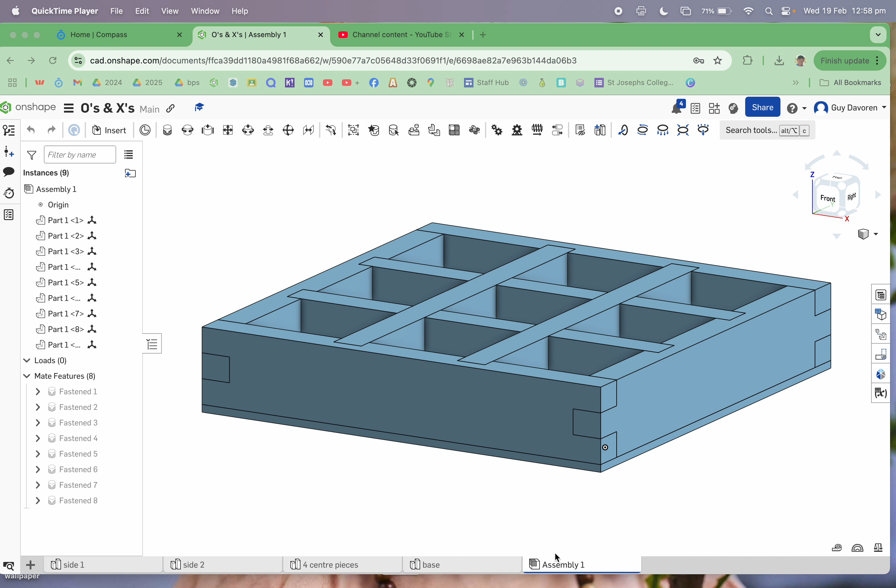G'day Year 9. So now I will do the orthographic drawing from the assembly that we've got. So far I've got side 1, side 2, all drawn in separate design part studios, the base, and then we've put it together. So there's our assembly. So what we're going to do is set up an orthographic drawing with that.

So we come over here once again to the plus, the insert, the new tab over here on the bottom left, and this time create a drawing.

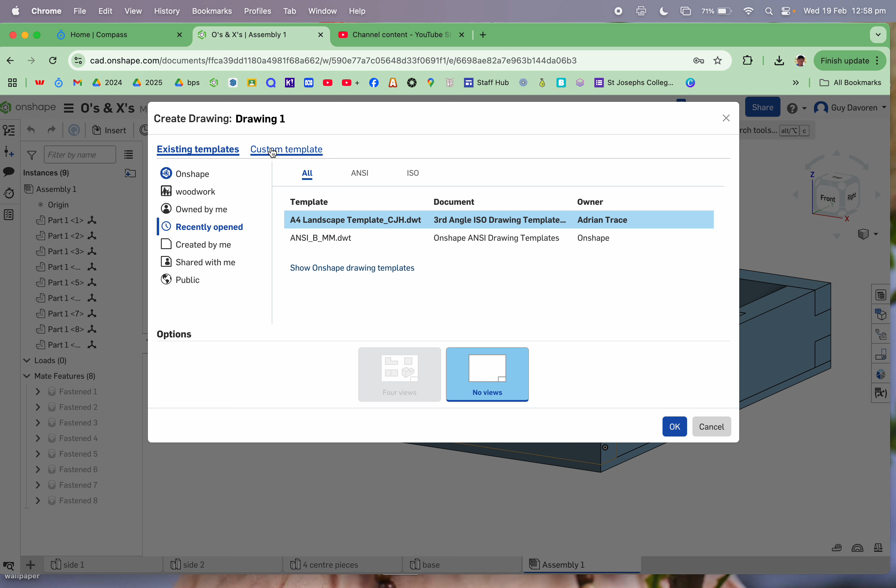Now, there are existing templates and there's a custom template, so I'll go through what I want you to do on this one. If we do the existing one, when you draw it, it comes up with its own title block. So I'm going to go custom, ISO, size, we'll change that to A3.

Now it's in millimeters, so that's fine. This one doesn't matter. Down here, I want you to change that to third angle. I'll explain what all that is later on, but we go to third angle. Border, we can include the border. These things don't matter. Start zones, that's okay. And the title block, we don't want the title block, so do not include that. So it's ISO, A3, millimeters, third angle, do not include title block. Then we go, okay.

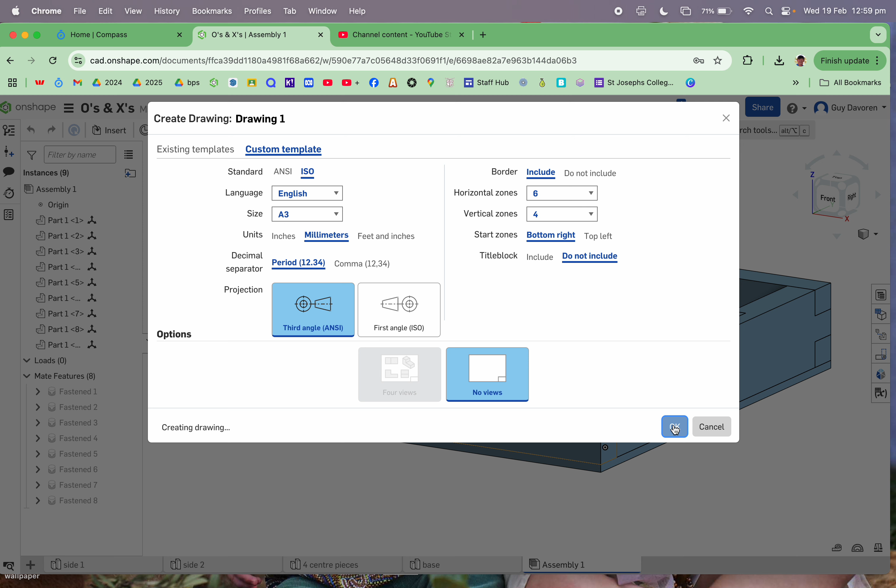Okay, we get the drawing sheet like that. Now it's similar to the other ones where you can insert things. So we can insert things from the part studios, the individual pieces if we wanted to do a drawing of just individual parts, but I wanted a drawing of the whole assembly. So I go over here to assemblies. That's what I want in there.

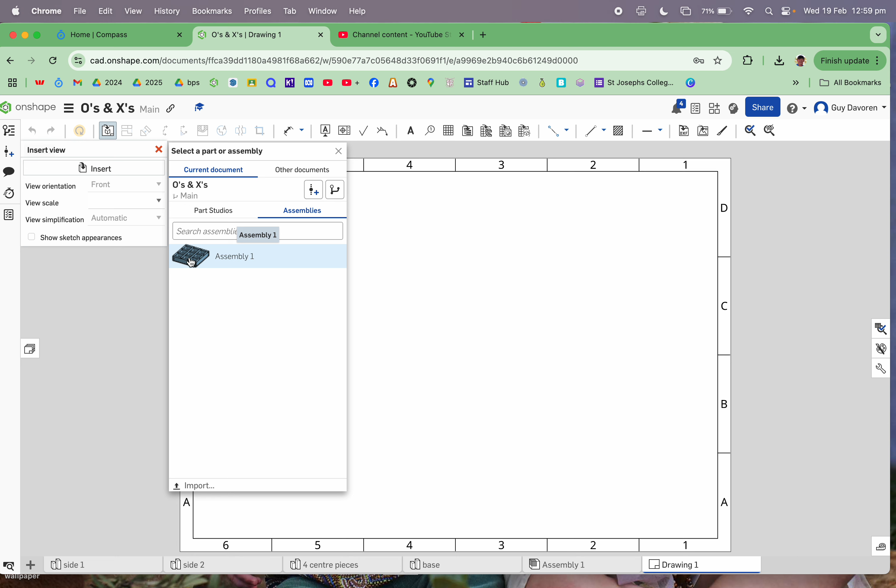See, when you're setting this up, you can change that scale to different sizes, but 1:2 works pretty good for this one, so we'll just leave it at that. See, if I did 1:1, we're not going to fit everything on, so 1:2. So you just check that before you start.

Okay, but I'm going to put the first view about there. Just click it and just got to wait for a second. Now if I drag my cursor, see how it draws the top view above it? Now I want an equal sort of space between, underneath, in between, and to the top of the page.

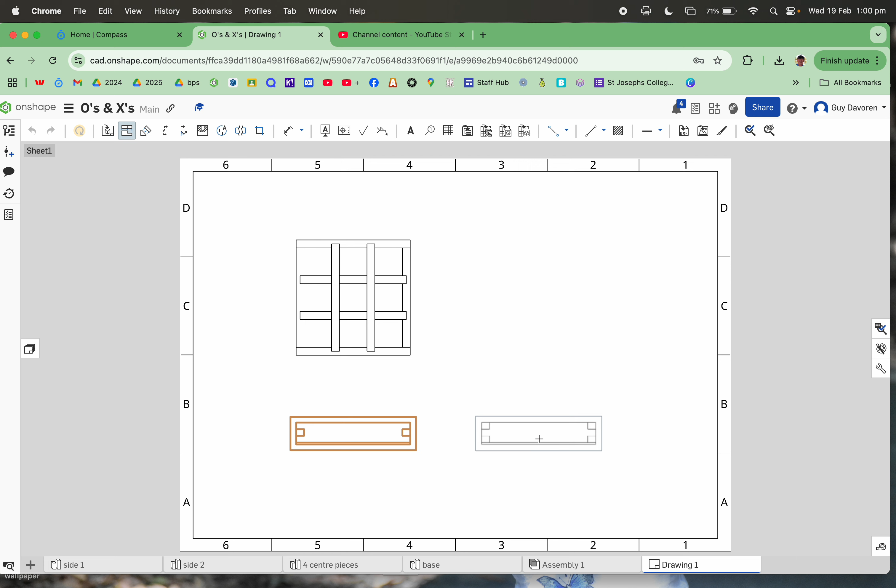So that'll do there. Now come back down to the front view, click, and it goes that darker brown again. This time I'm just going to come straight across. Don't rush this step because you can make a bit of a mess of it. And I'll click again now. And finally I'll come back to my front view again, click it, we'll get that brown, and then bring it up to the corner. You sort of don't click too early, but position it so that it's in a reasonable spot. So that looks okay there. And I'll click that. So there's the basic setup of my drawing.

Now the other things that I need to do will be to put - I might do the dimensions first. So this is the dimension tool. If I click that, if I put the dimension across there to there for starters, bring it up, and you slide it across and it'll snap on the middle, but that looks okay there.

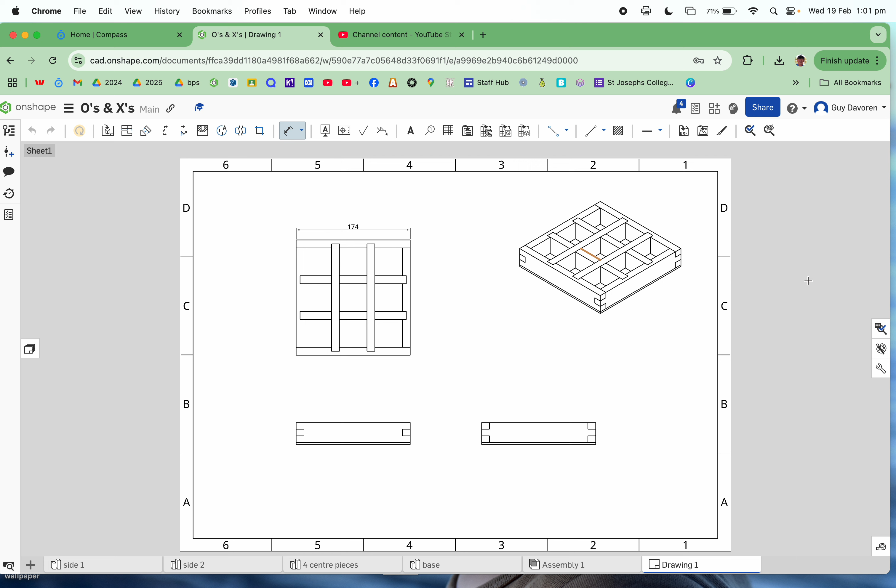Now the only problem with putting all these dimensions on is that because they're the same color as the drawing, often by the time you're finished, it's hard to tell where the drawing starts and finishes. So if we come over here to the little spanner, drawing properties, click on that, come up here to dimensions, click on that, and then to color, and just pick another color. That'll do for green, and you can see now it's changed to the green color, so it just doesn't stand out as much. Okay, so I'll get a few more dimensions on quickly.

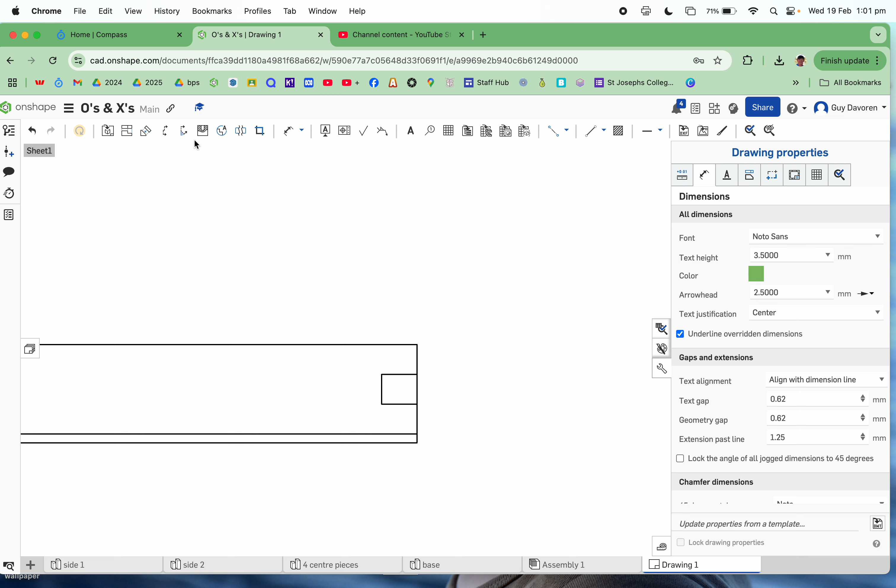Dimension. Now you can see how you can move it, and if that's going to be fairly cluttered there, I'm going to put the number on the outside. And I'll do that one as well. That will do there. Now I know I'm going to put the 30 here because that tells you exactly how big it is without having to

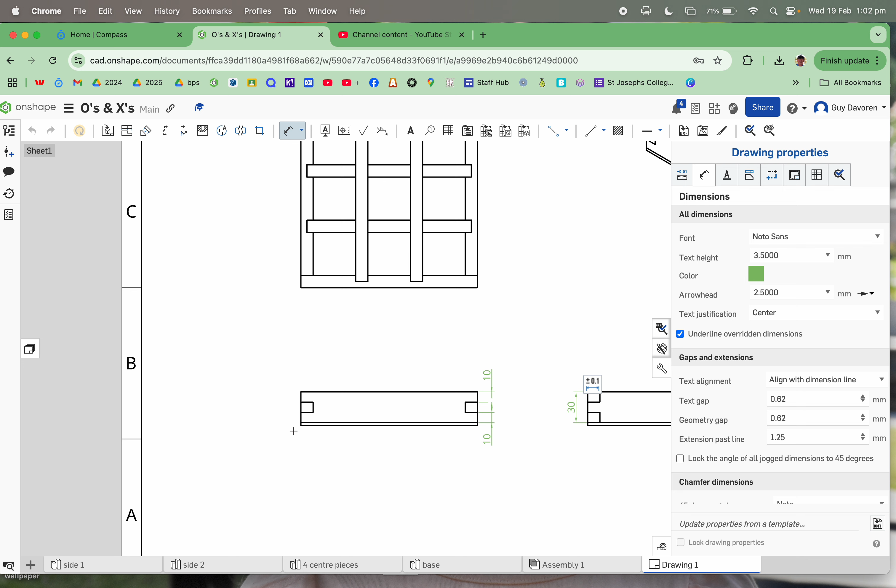Have 3 dimensions all cluttered there. Now on this side, I might just come in here and do that one there. That just shows how thick the base is, and I'll put the 3 out of the way like that, move a little bit further away.

All right, so we've got all those covered. We've got the overall one there, so I'll need the overall one here. 174. And we'll also want these. Now so I'm touching that corner, bring it out, and it'll snap on the same size for me.

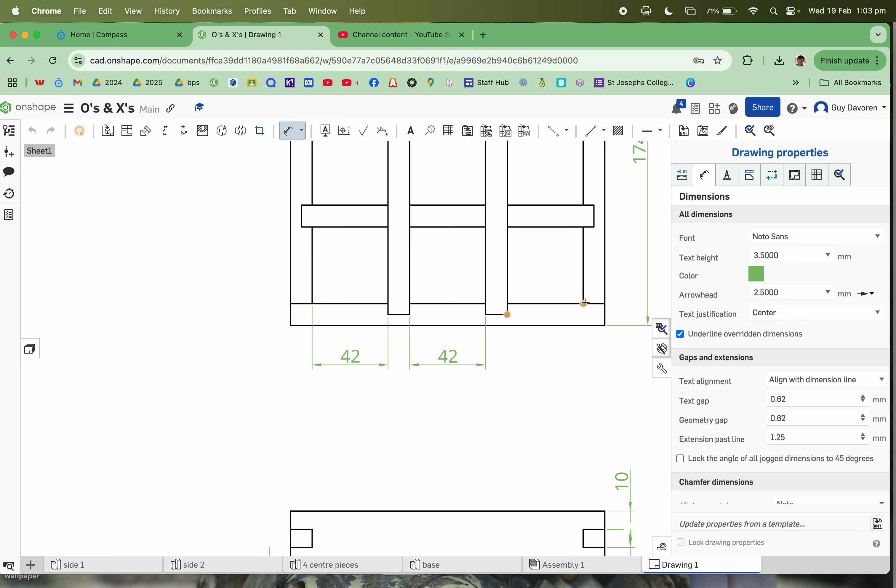And with this one, I'm going to go from there, and see it has to go across a bit of an angle, but still when it comes down, it will come down straight. That's all fine there, close that up again now. That's possibly enough as far as dimensions go. Yep, that'll do for that.

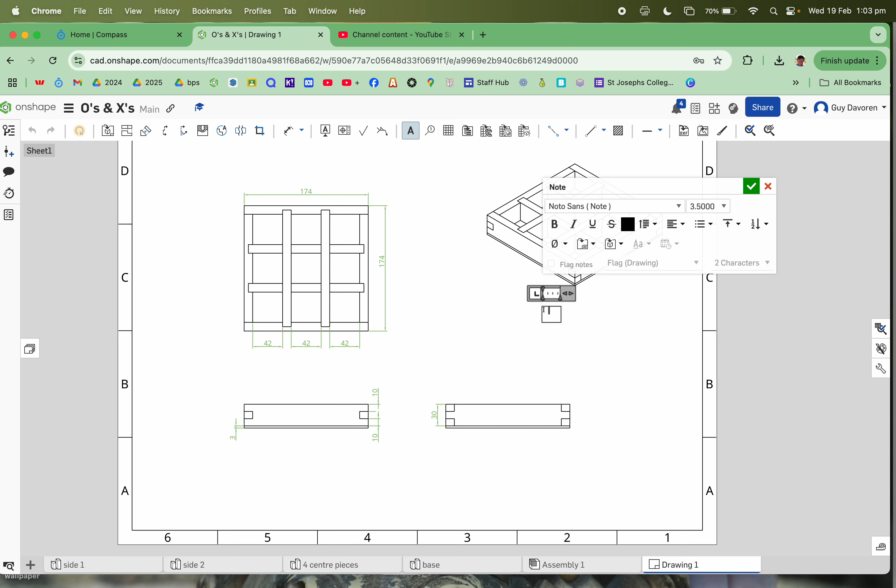So now we go to text. We'll just label each of the views. So I'll call that one the isometric view because that's what it is. And tick it. Now there's something funny about this, how now if I go in and close that off, now when I select it, I'm able to drag it out so it's just in one line. I haven't worked out why that happens.

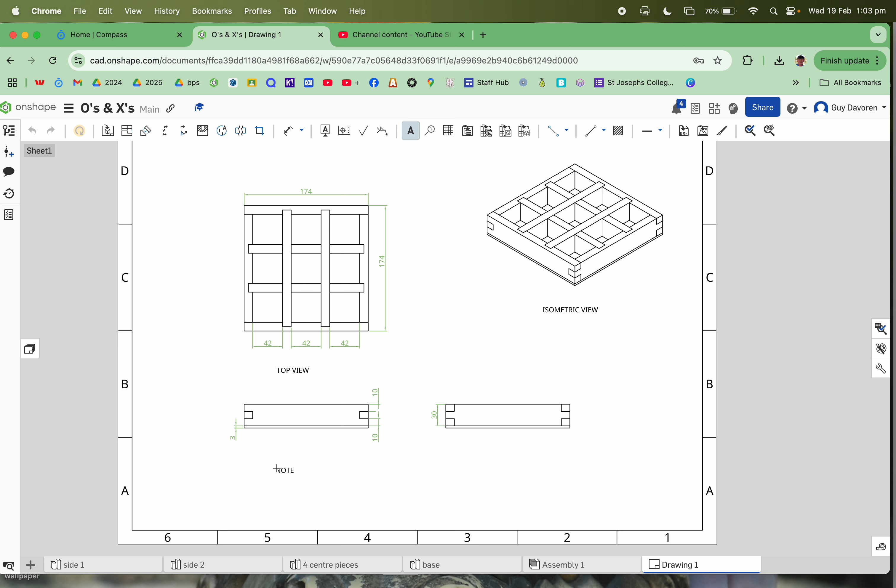But now this one's called the top view because you're looking down on top of it. Tick. Let's come out right, that one. So this one's going to be the front view. Tick. So this is what I'll have to go in, cross it, come back and select it again and let me drag it out. And the last one will be down here, so that's going to be the right side view. Because you're looking at it from the right side, right hand side. Tick.

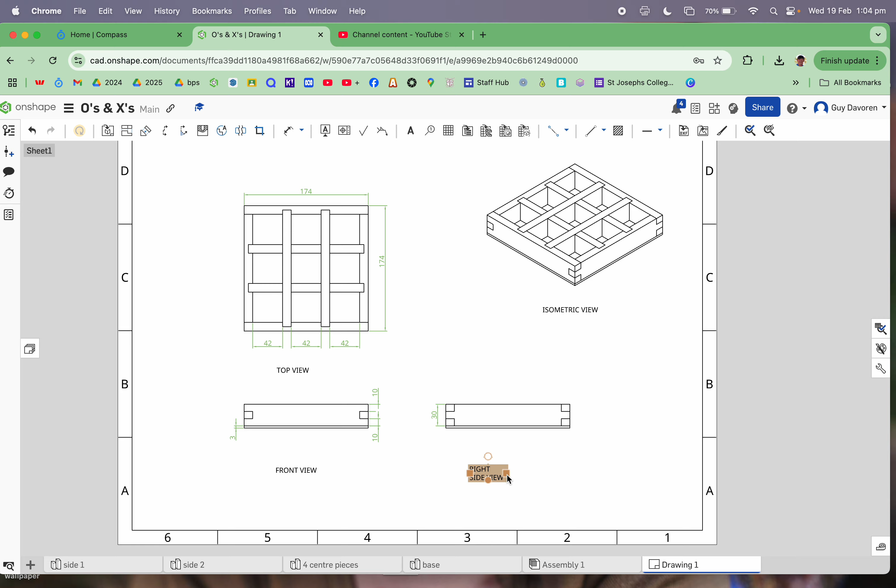Now, title block. Down here, I'm going to get the line tool. There, that should be big enough. I'm just going to draw a box. Don't worry about measuring it. That should be enough there. Click and click. And I've done the outside first because then when I come in to get my line tool again, it'll snap on the midpoint for me. I don't have to measure anything, but that looks okay.

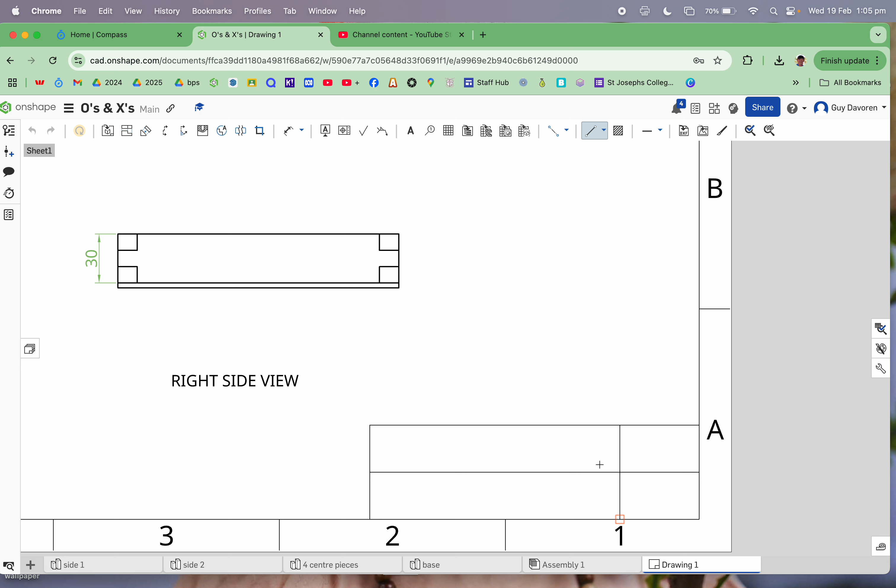Escape that, get the line tool again, and take it down. Then I've got 4 little spaces to put stuff in. All right, so I'm going to go there. The drawing is the noughts and crosses box, so

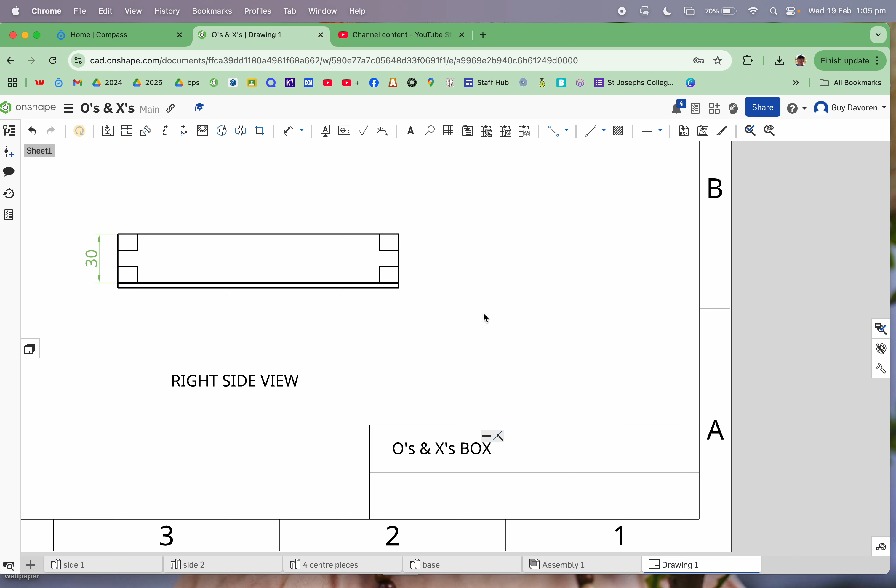And if anybody works out how to fix that text so I don't have to keep doing that, let me know. I'm sure there's a merit in there for you. Okay, so there's that. I'll put my name in the next one. If I can find the text, there is.

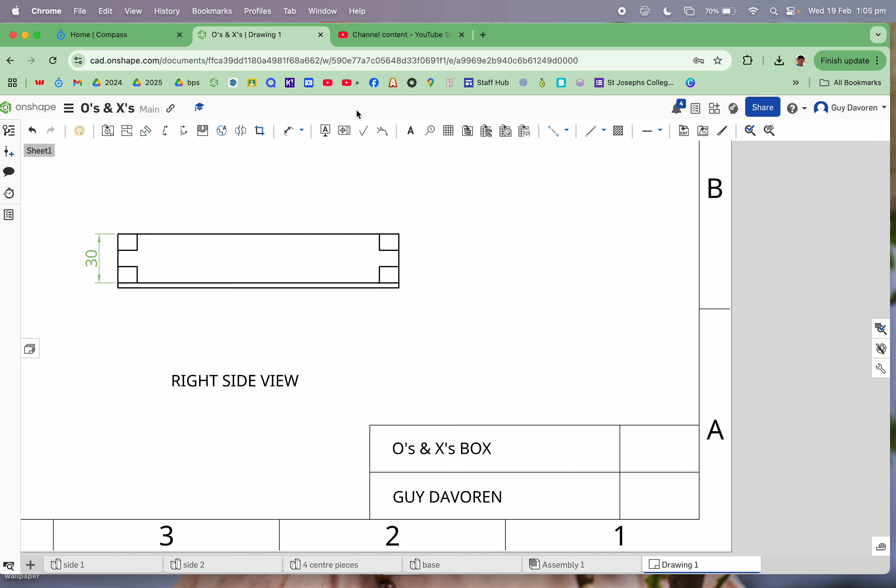And in the other two, it doesn't matter, put year 9, 2025 will do. So I'll quickly do it then. Year 9, 2025.

Okay, now if you wanted to print it out, we can come over to here, and there's your print, so you get your print menu if you wanted to do, but if you get that far, that's great. Good luck.